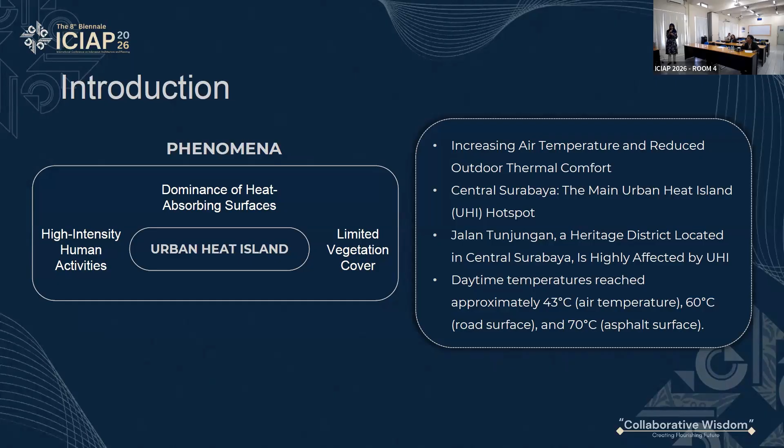For the research gap, previous studies about urban microclimate or urban heat island focus on thermal effects on horizontal surfaces like roads and roofs. Studies on the influence of building facade albedo on outdoor thermal conditions are still limited, and existing research mostly uses simulation microclimate methodology or laboratory experiments with limited field-based evidence.

For research originality, this research investigates the combined influence of building facade albedo and pavement materials on the outdoor thermal environment. The objective is to analyze the effects of facade albedo and pavement materials on outdoor thermal condition, and second, to evaluate how existing material characteristics affect surface temperature and outdoor thermal condition.

This is the methodology. This research uses field observation or field measurement, conducted in October over a 7-day period, but the research focused on 3 clear sky days to minimize weather variability. The location is Jalan Tunjungan heritage area.

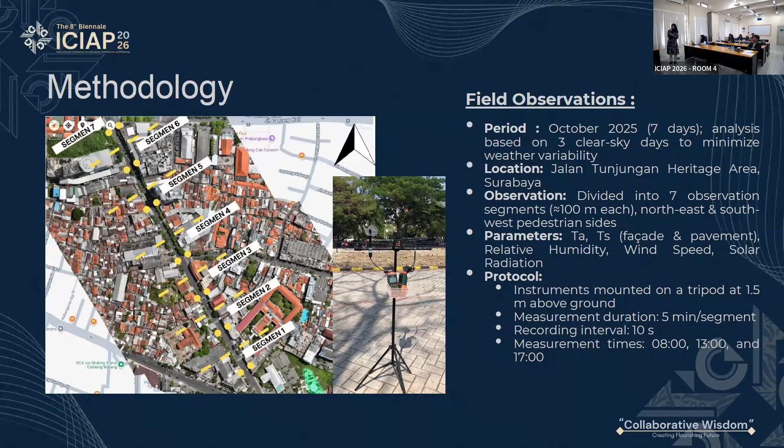This is the result and discussion. This picture shows the physical characteristics across all segments from segment 1 to segment 7. Segment 1 is on the northeast side: pavement combined with coral stone, 2 meters wide. On the southwest side, pavement combined with ceramic, 2 meters wide, and concrete, 2.5 meters wide, with buildings reaching up to 10 meters.

Segment 2, northeast side: pavement combined concrete, 4.5 meters wide, buildings 15 meters, with sparse vegetation. Southwest side: pavement combined ceramic 2 meters and concrete 2.5 meters wide, 5-meter buildings with denser vegetation. Segment 3, northeast side combined with 2 meters coral stone.

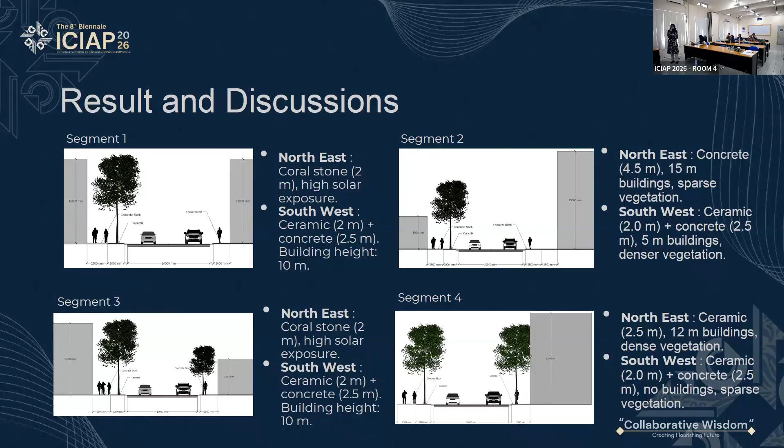And then the segment 5, the northeast side, the pavement combined 2.5 meter and concrete 2 meter with 10 meter building.

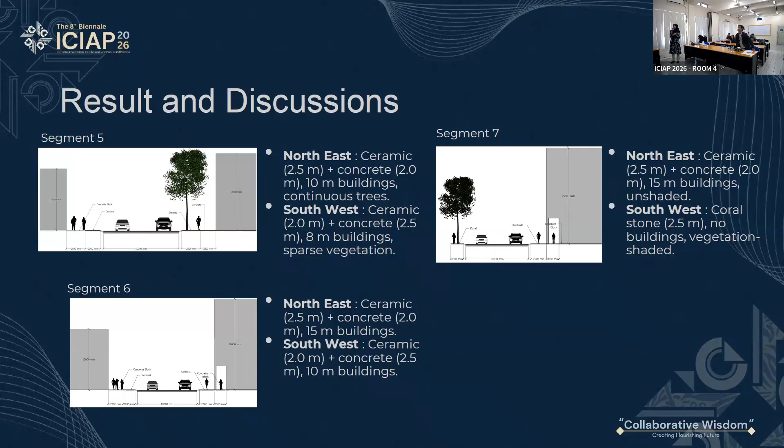So this is segment 6, and segment 6 has similar condition with segment 5 but with no vegetation, and segment 7 has a condition different with segment 6.

This is the optical and physical properties of surface materials in existing condition.

This table shows that material that have brighter color like white color have the highest albedo values, contrast with asphalt with the darkest color which have the lowest albedo values.

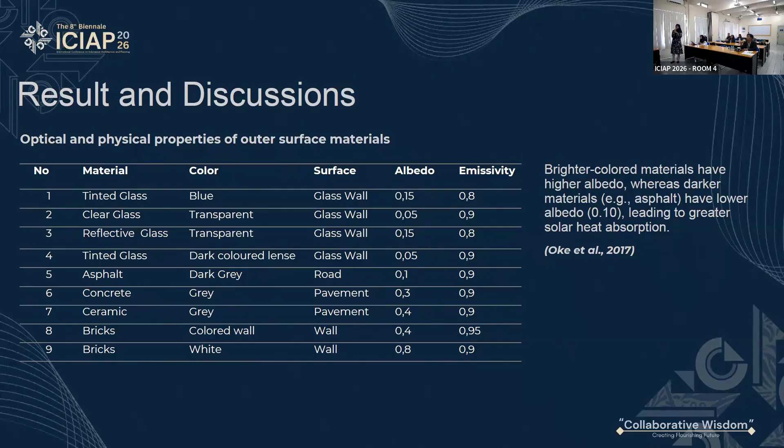This is the result of air temperature. We try to correlate between air temperature and urban morphology. This result shows that between open area ratio

and high albedo materials and height to width and vegetation covered, these four urban morphology have no correlation with air temperature, but the most significant correlation found is in the relationship between height to width ratio.

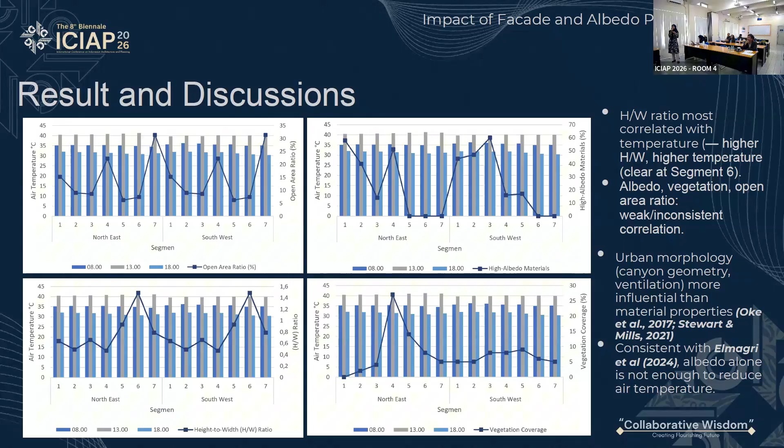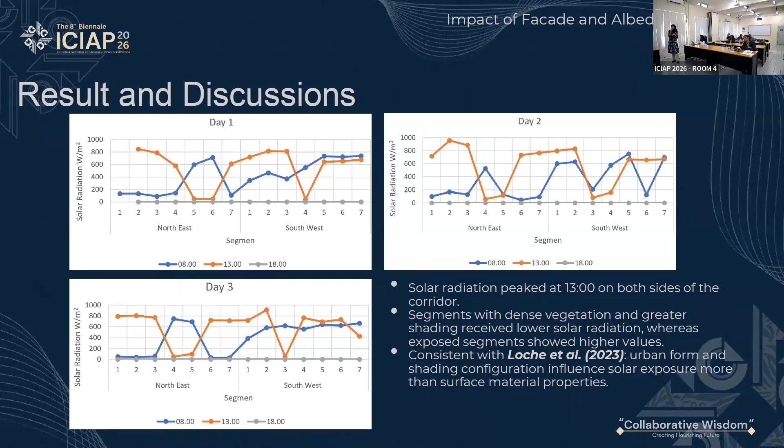This is the solar radiation. This shows the solar radiation is really consistent from day 1 to day 3.

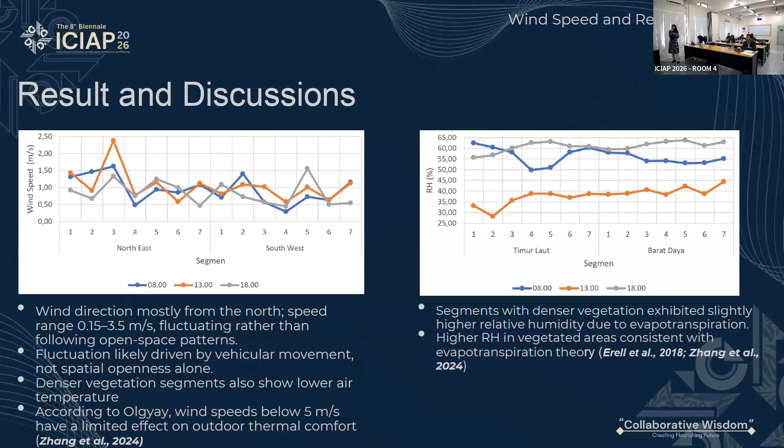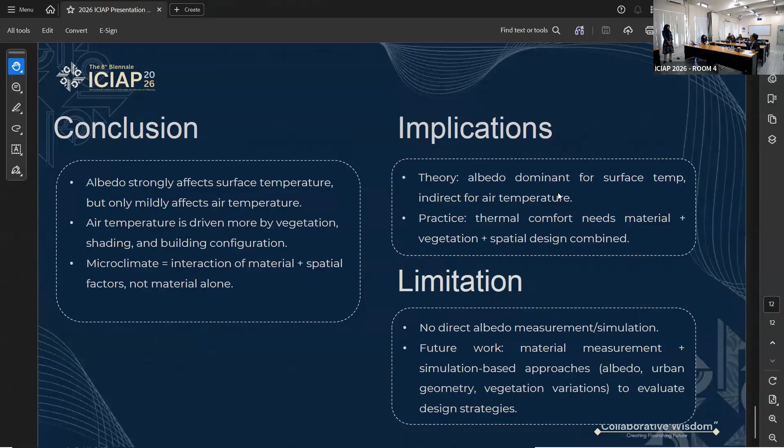Could you introduce yourself, Julia? All right, okay. Hello, Anissa. Okay, this is a bit awkward because we actually work together. But anyways, my name is Audrey, and I'm also from ITS.

So, Anissa, after all of this research, this could be the initial step, right? So what's gonna be the next step? Are you gonna, for example, simulate this using other kind of software, or are you gonna broaden the location objects or the measurement points, or is there anything else?

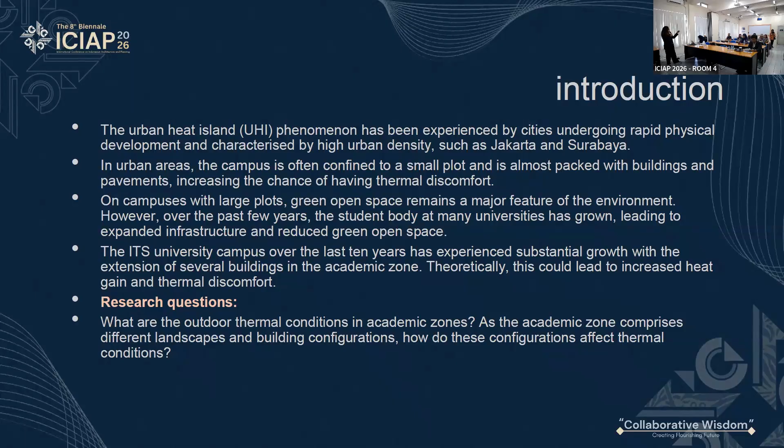And this drives this research question: how are the outdoor thermal conditions after all of these changes in the last 10 years? And most importantly, how does the different landscapes and building configurations, the difference in the ratio, affect the thermal conditions?

Just a bit on to the theoretical framework - I want to talk about how other research has studied the microclimate of university campuses in tropical regions. But our research focused on more than that. We want to see how the ratio between natural features and man-made features affects the formal configurations, and how it impacts air temperature, relative humidity, solar radiation, and lastly, wind speed.

This is the most important part of our research because we're going to rely on this data a lot later on. Our research is again a field measurement, and we try to categorize our campus into 4 big categories.

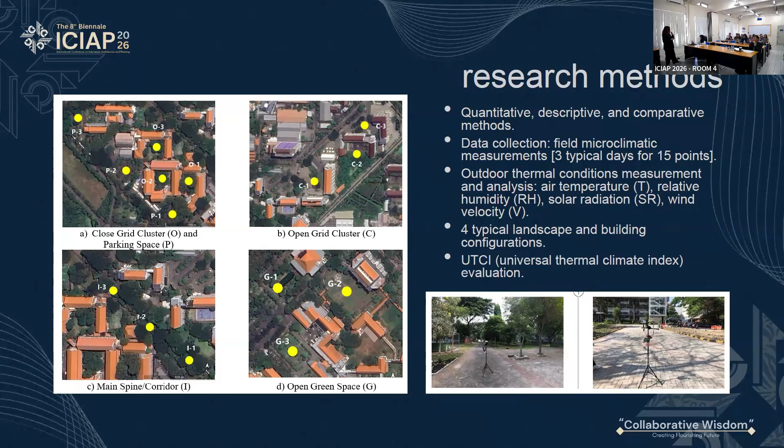Next we also have the main spine or corridor - most likely this is the main road of ITS. They're not enclosed by just buildings, they are covered with dense trees and vegetation. Lastly, we also have the open green space where there are just vegetations around.

Interestingly, after using the sky pictures on top and identifying the ratio between the man-made features and natural features, they appear to be equal - it's 50 by 50 for most of them. But the question is, between all of these 4 categories that I mentioned, do they perform the same, since they have the same ratio? I will talk about that more after this.

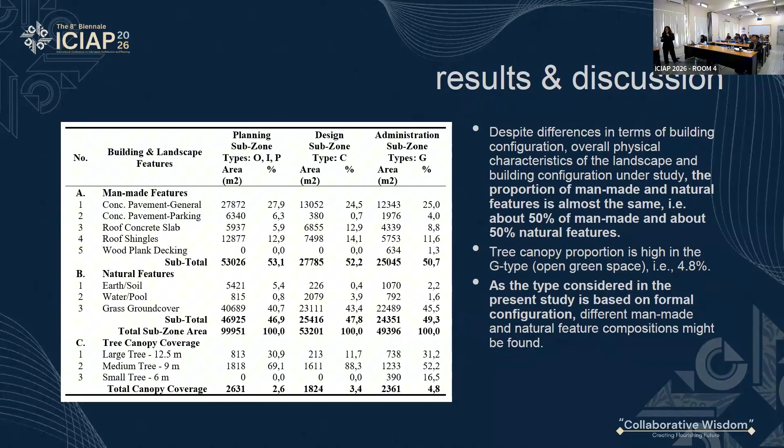Right, so here are our results and discussion. As mentioned before, we have 4 different metrics, so I'll try to dissect into them one by one. The first one, we have air temperature.

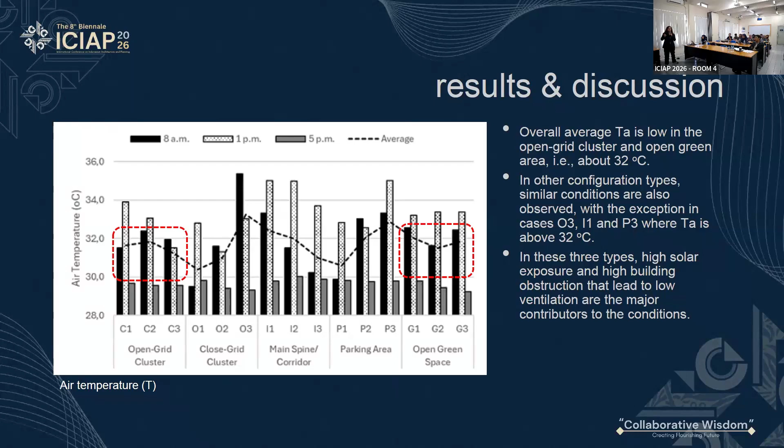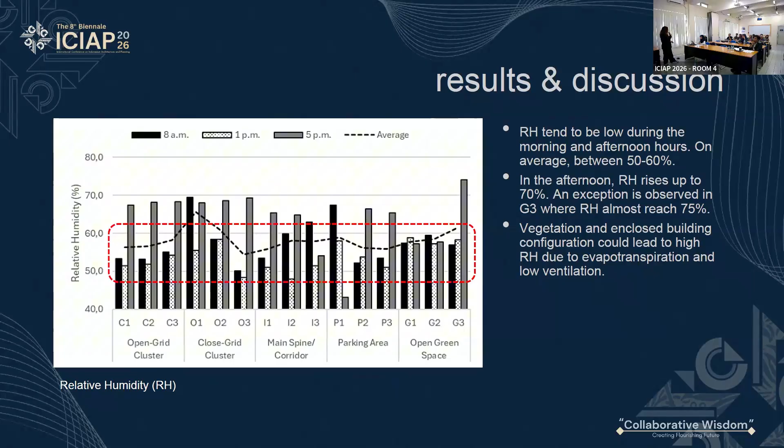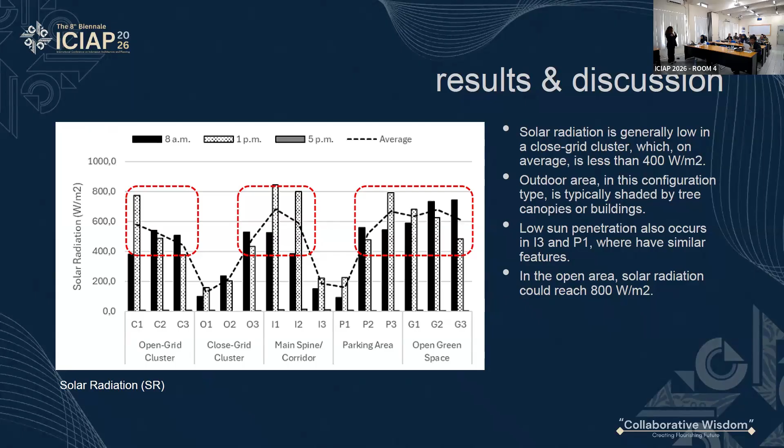But then in the open area, because they don't have any obstructions or shadings, they tend to have really high solar radiation. They reach like 800 watt per square meter.

So now it comes to the last few slides that I have. In general, you can tell that the main spine, which was the main street, tends to have the highest air temperature and also highest solar radiation. This is because of less wind penetration and high solar exposure.

And then when it comes to average relative humidity, it comes to this closed grid cluster. Again, because they are trapped, the buildings are surrounded into a tight square, the heat trapped into the building cannot dissipate, cannot go through the buildings because they're again really tight.

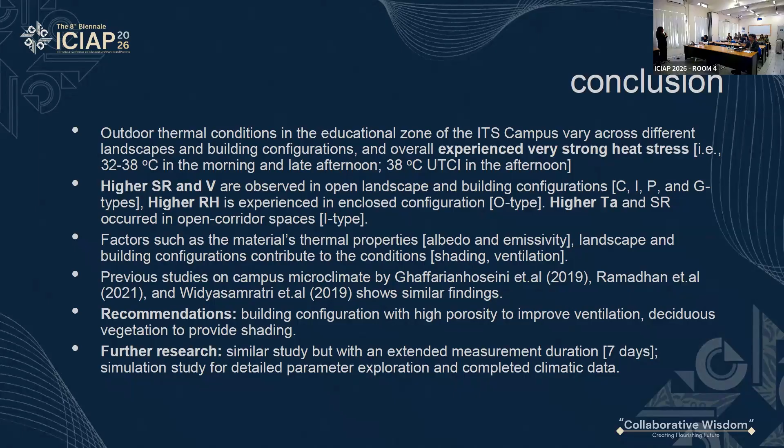Time's up, I guess that was it from us. Here are some recommendations and further research that we can read as well. Thank you so much.

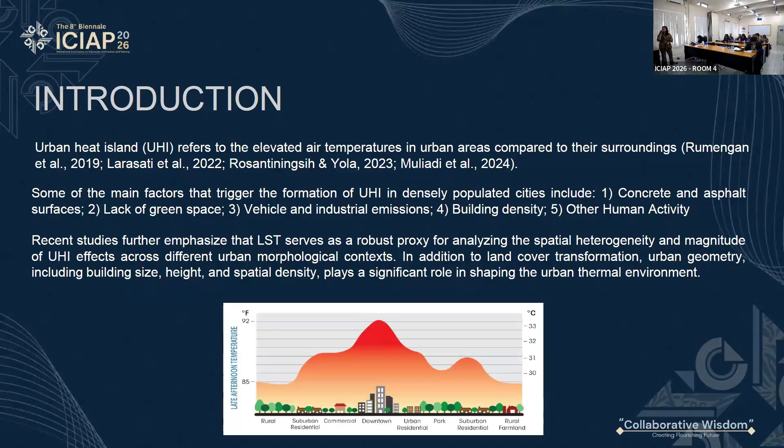As we all know, urban heat island or UHI refers to elevated air temperature in urban areas compared to their surroundings. There are many factors that trigger the formation of UHI, such as concrete and asphalt, lack of green space, vehicle and industry, building density, and other human activity.

Cilegon City, especially, is located in Banten and is developing into the largest steel and petrochemical industrial center in Indonesia. There is Krakatau Steel here, and industrial area covers nearly 30% of its total land area. But there are some places still largely covered by protected forest area, so there is significant variation in building density in this city.

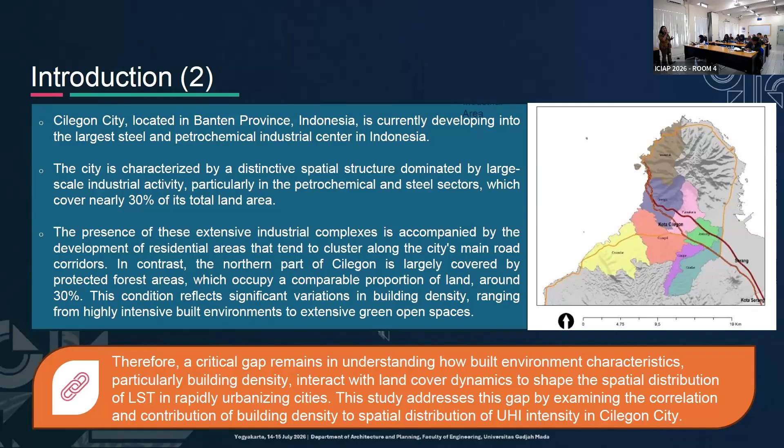Therefore, the critical gap remains in understanding how built environment characteristics, particularly building density, interact with land cover dynamics to shape the spatial distribution of LST, land surface temperature, in rapidly urbanizing cities.

The method we use is correlation analysis by ordinary least squares (OLS) and Moran's, applied to land surface temperature and UHI. The land surface temperature will be categorized into UHI area and non-UHI area, and percentage of building density. Both will be compared in hexagonal cells of 50 hectares, using data from 2010 and 2020.

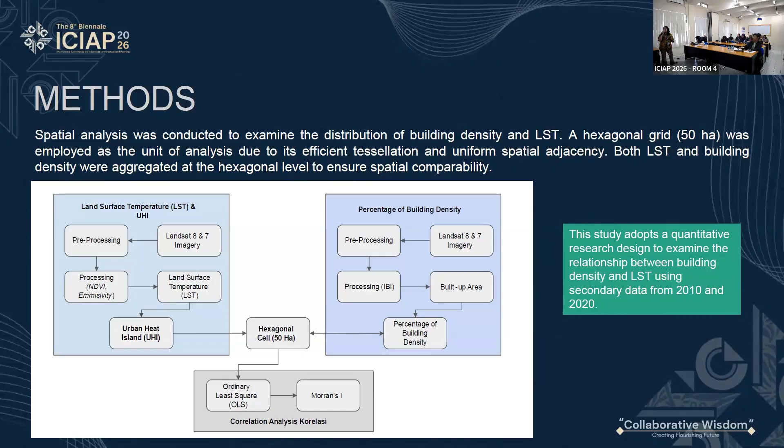And then spatial distribution of LST and UHI. So to differentiate UHI from non-UHI, we use the equation. From the land surface temperature and then UHI, we can see a similar pattern. The red one is UHI and the yellow one is non-UHI.

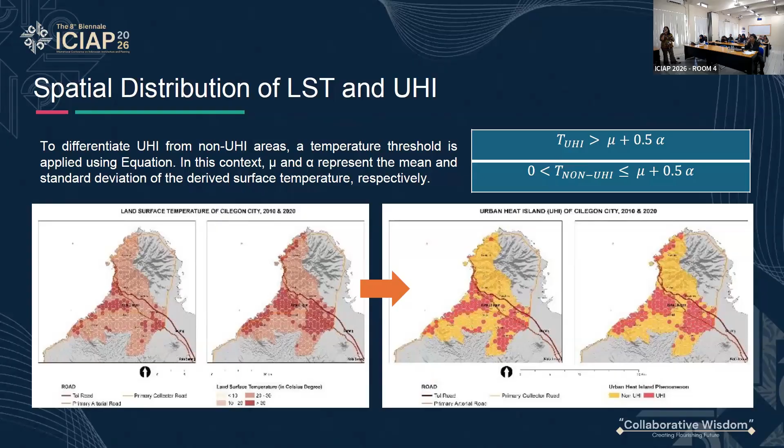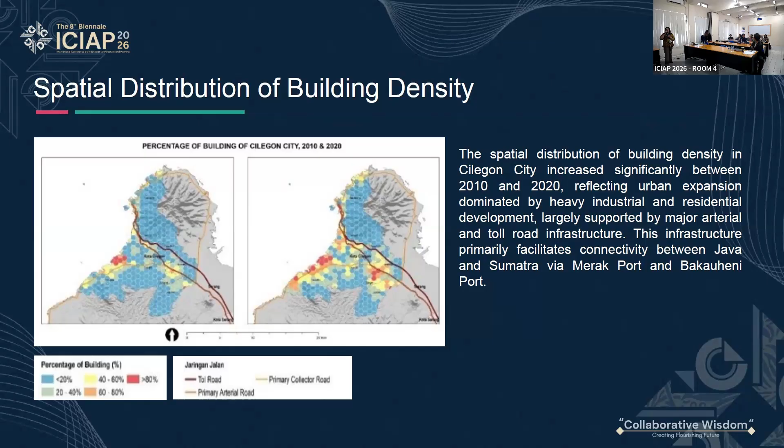For building density, we can see from 2010 to 2020 there is an increase in building density, and this increase is along the main road. There are facilities to facilitate connectivity between Java and Sumatra via Merak and Bakauheni Port, so we can see the increasing building density along the road.

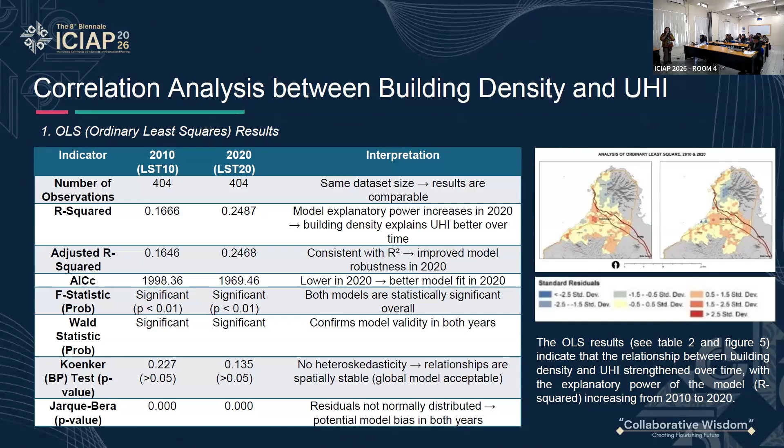After that, we do the correlation analysis between building density and UHI. From the OLS result, we can see that the relationship between building density and UHI strengthens over time, with the explanatory power of R square increasing from 2010 to 2020. We can see R square increasing from 0.16 to 0.24. So we can see the increase, but it's still low, yeah, still low.

For Moran's I result, we can see that the analysis indicates a significant positive spatial autocorrelation in 2010 and 2020, confirming that urban heat patterns are clustered rather than randomly distributed. But we can see that in 2020 there is weaker clustering because the urban expansion is more dispersed.

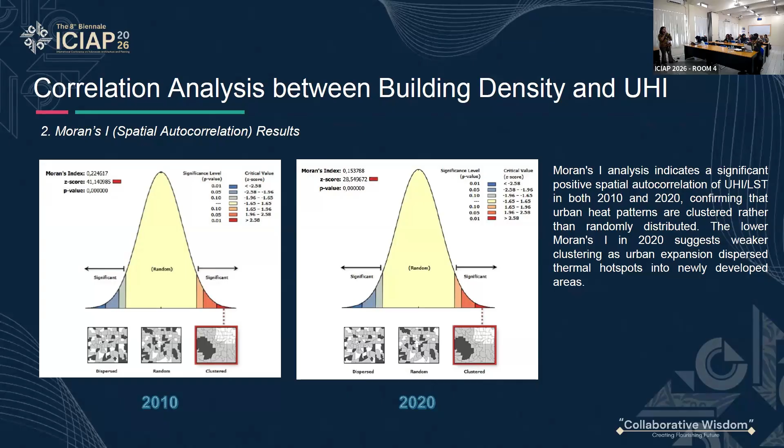So for the discussion, from the OLS and Moran's I, it's confirmed that there's a significant positive relationship between building density and LST, but UHI cannot be explained by building density alone. From the R square we can see the number is still low, meaning there are other factors that contribute to UHI.

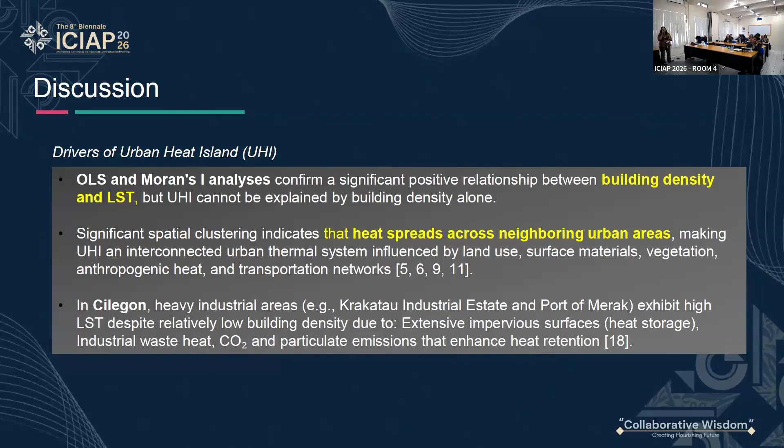In Cilegon, we can see that there are places that exhibit high LST despite relatively low building density, due to industrial waste heat and carbon dioxide emission from industry.

And then what can we do as a planner, what is the mitigation? First, we can increase non-built land, and then strengthen the green space provision or Koefisien Dasar Hijau (KDH) to be stricter in the industrial area.

This one is interesting: creating connected green corridors rather than isolated green spaces, so the corridor gives more cooling. And then integrate UHI mitigation into the RTRW spatial planning through green infrastructure, high albedo and permeable material, waste heat management, emission control, and industrial buffer zones.

So the conclusion: this study demonstrates that there is a significant positive relationship between building density and LST in Cilegon City, and there is a strengthening of this relationship from 2010 to 2020, indicating that urban densification increasingly contributes to the UHI effect.

However, the Moran's I analysis confirmed that this relationship is not spatially uniform—the UHI pattern exhibits significant clustering influenced by local conditions. In particular, industrial land use plays a critical role where high surface temperature occurs even in areas with low population and low building density. This highlights that many factors contribute to UHI in Kota Cilegon.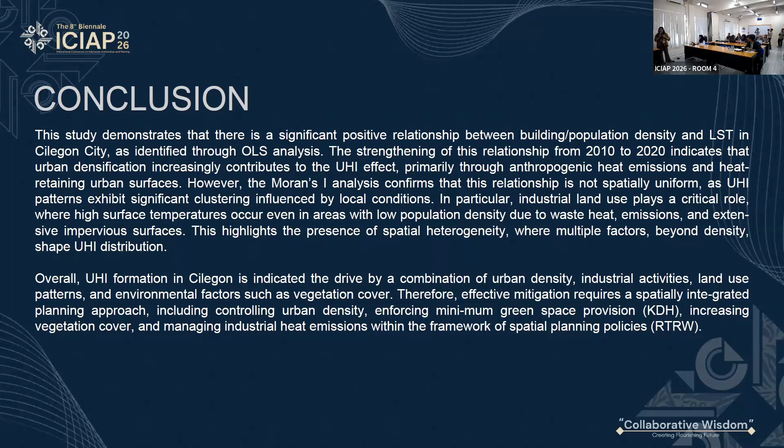Therefore, to do mitigation, it requires a spatial integrated planning approach, including controlling urban density, enforcing minimum green space provision, increasing vegetation cover, and managing industrial heat emission within the framework of spatial planning policies such as RTRW or even RDTR. Okay, that's all. Thank you for your attention.

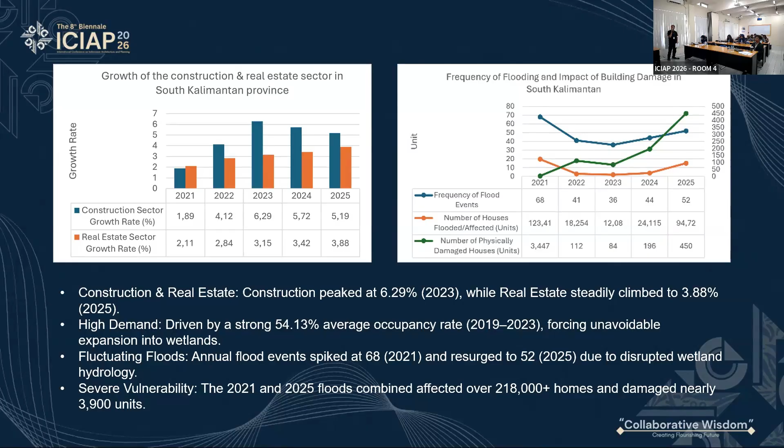However, driven by growth of real estate, buildings, houses etc., from about 54%, this is getting bigger each year, causing wetland coverage by buildings, and technically increasing flooding and building damage impact in South Kalimantan.

From my previous studies, along with my lecturers Muchammad and Huzairin, we highlighted the construction of traditional houses and identified the conceptual framework of the Suku Banjar community. The previous studies also only covered one object, with no building criteria, so this research identifies the correlation between resilience and building in the community.

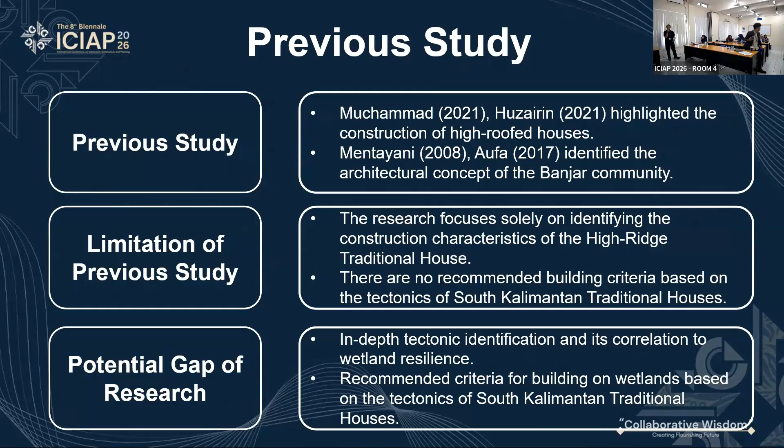So the output and goal of this research is to observe the tectonic characteristics and capability of wooden construction, and provide recommendations for vernacular building.

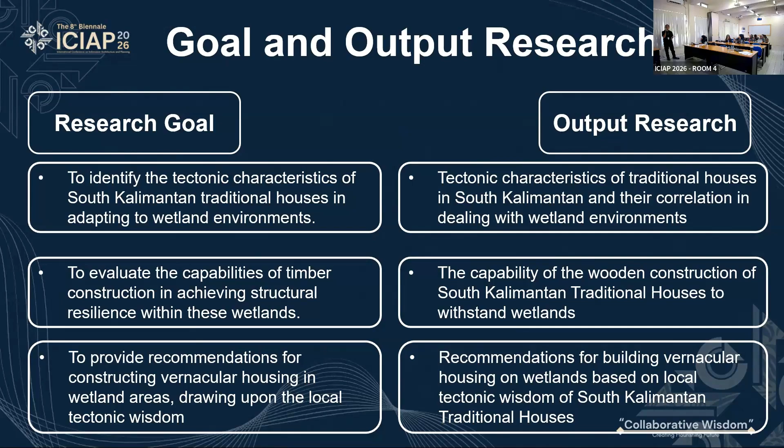The conceptual research framework - the output of this research is building knowledge in vernacular construction for wetland resilient buildings and flood mitigation in South Kalimantan.

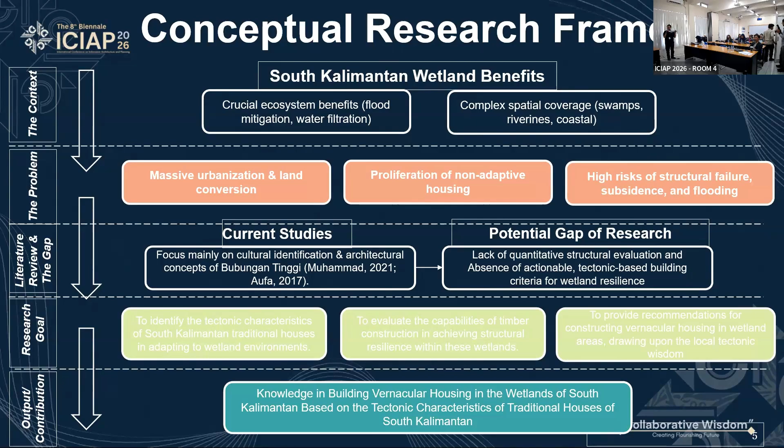For the objects, from 12 typologies, we use only 2: Bubungan Tinggi and Gajah Baliku. The methodology has 3 steps that I've conducted: Goal 1 using qualitative method, Goal 2 using quantitative method, and Goal 3 using mixed-methods synthesis.

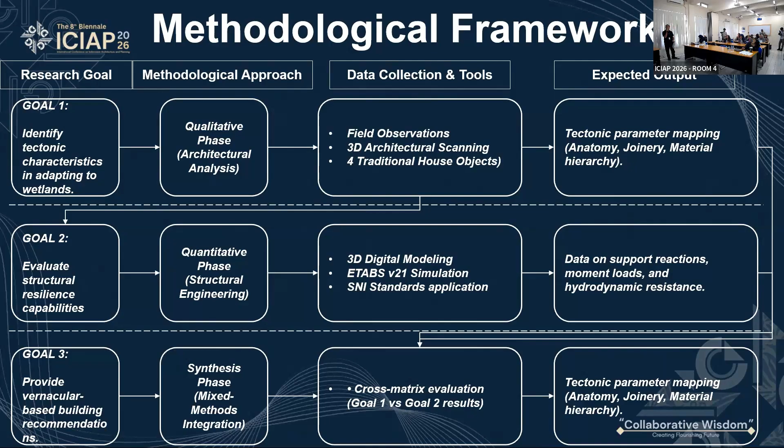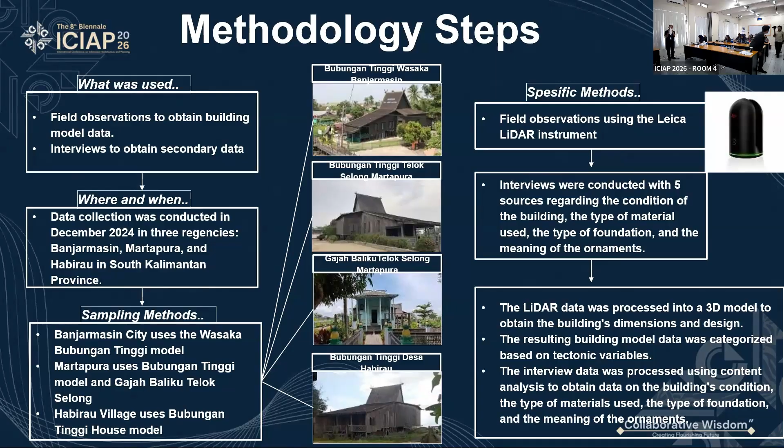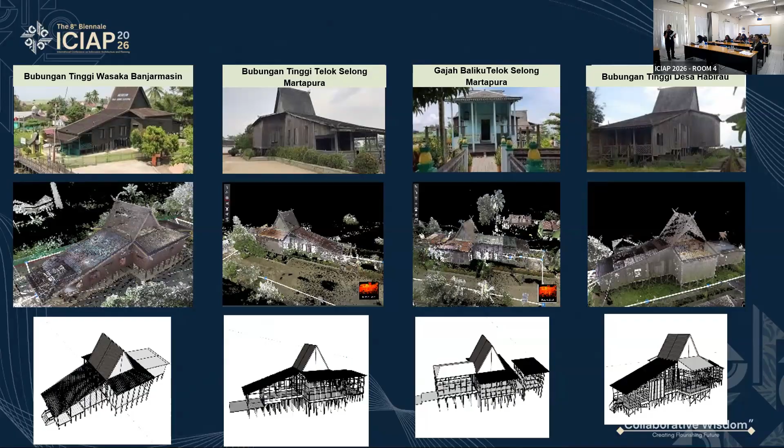The methodology: the first step uses qualitative methods with tools called Leica LiDAR, using 3D object scanning across 4 objects. After using Leica, we use 3D tool software, and from this software we analyze the previous synthesis tectonic variables.

And so for the research findings. Why can South Kalimantan traditional houses withstand wetland conditions and provide flood mitigation?

First, we should cite the site orientation, which is towards the river, and the building coverage ratio, or KDB, which is under 30%.

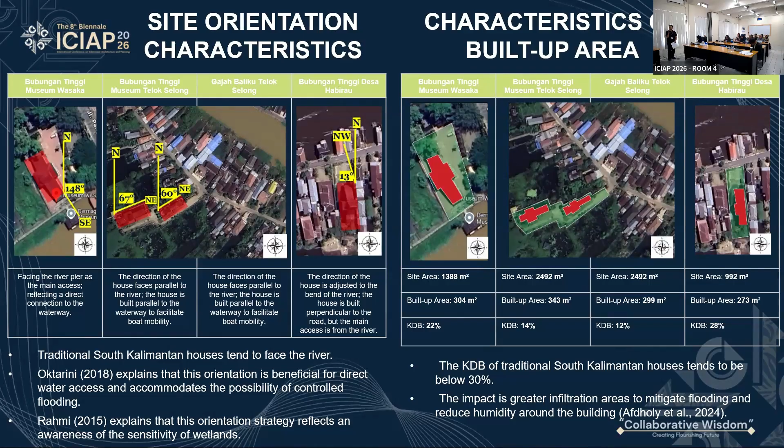As for the building mass, it tends to be slender and symmetrical, and the characteristics tend to follow more hierarchy.

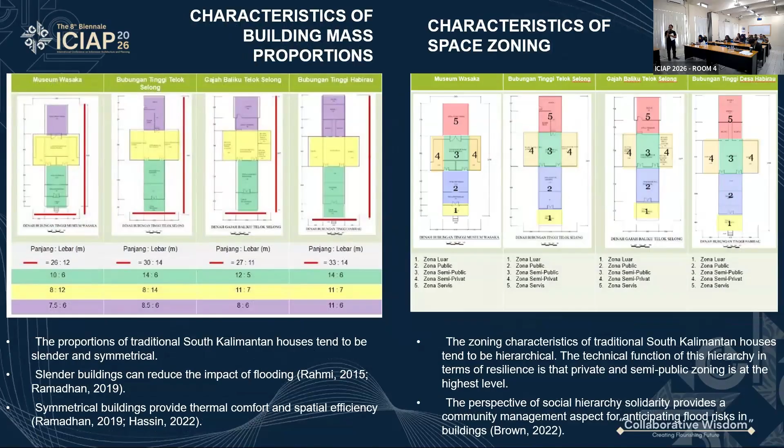For the building space, it tends to be symmetrical with ample circulation, and the internal space tends to be quite interconnected. This connectivity helps address challenges from humidity, thermal comfort, and improves disaster evacuation.

As for the window-to-wall ratio, the proportion tends to be much higher, around 45 and 40%, which helps mitigate thermal comfort and humidity issues, and also aids disaster evacuation.

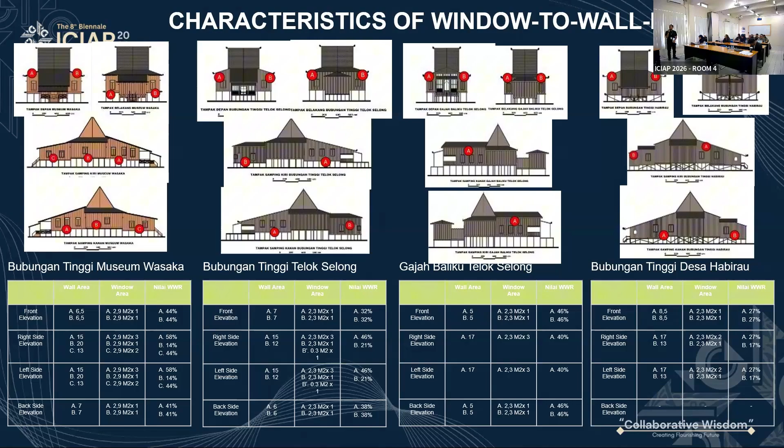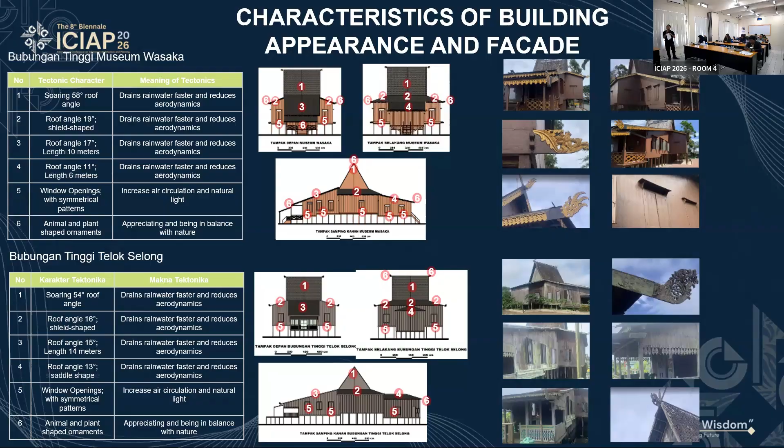As for the facade, the roof has about a 40 degree angle, which tends to mitigate high rain frequency. This is also seen in the same object.

From this building classification, we can see it is a stilt building, and the roof itself is at 40 degrees.

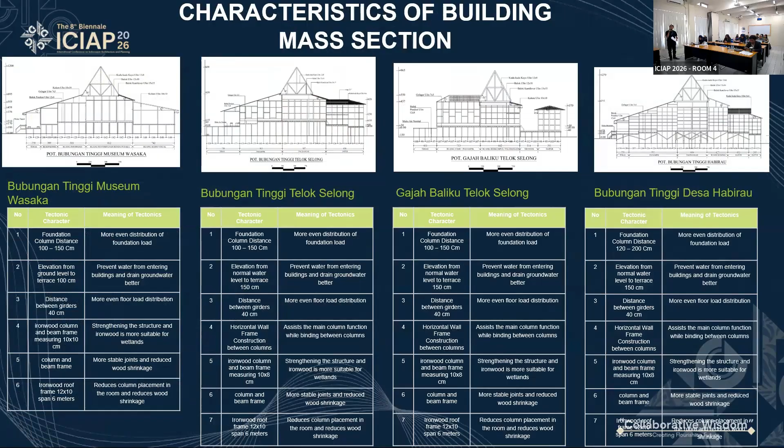From the architectural plan, it is also the same, with the building roof needing to be at 40 degree angles.

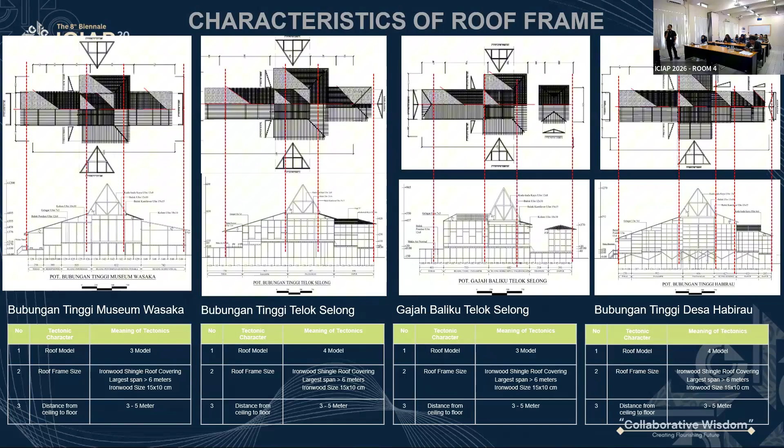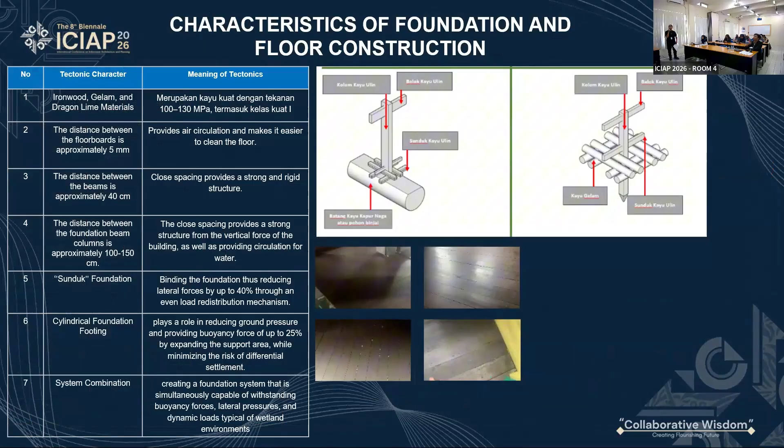This is what's called the uniqueness of South Kalimantan traditional houses. It has what's called a Kacapuri foundation, which can withstand about 100 years of wetland conditions and flood mitigation.

From the columns, there are pasak, mortise and tenon joints, lap joints, and takik joints. After using takik joints and mortise and tenon joints, simulations using these joint types show they can increase the effectiveness of the framing.

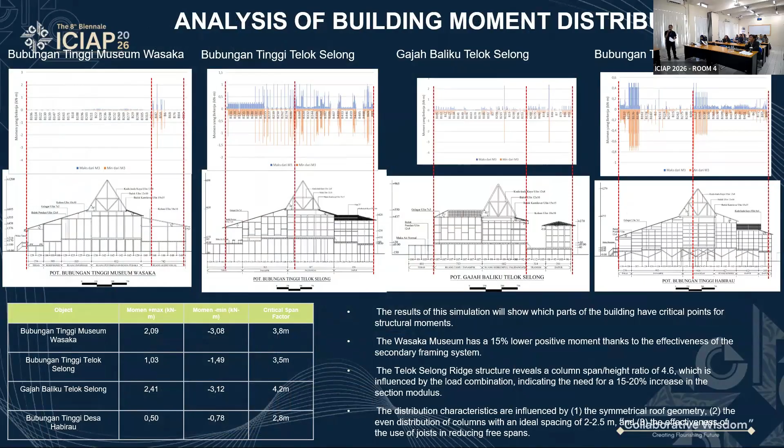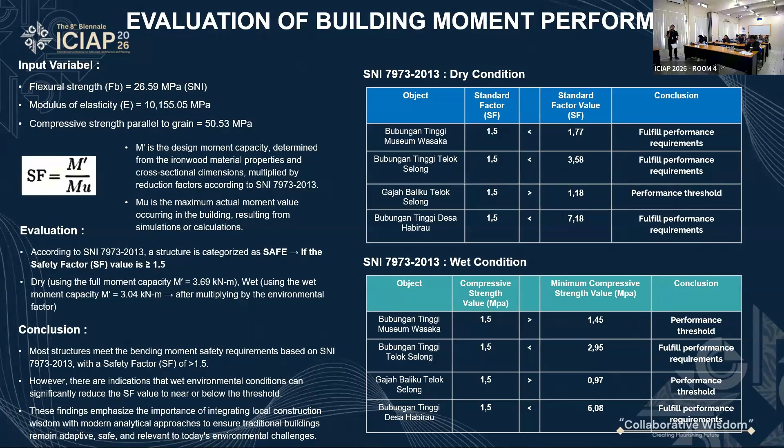This is simulated between using wet condition and dry condition scenarios.

From the support analysis, using rotation joints has actually increased the load distribution, and can increase capacity at certain points while lowering load at others.

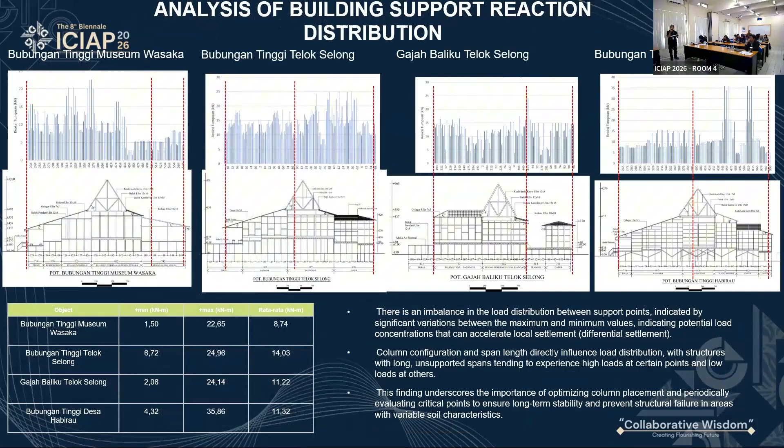From the support building reaction using construction materials, the building has fulfilled its performance requirements based on the Indonesian National Standard and American standard for wood construction.

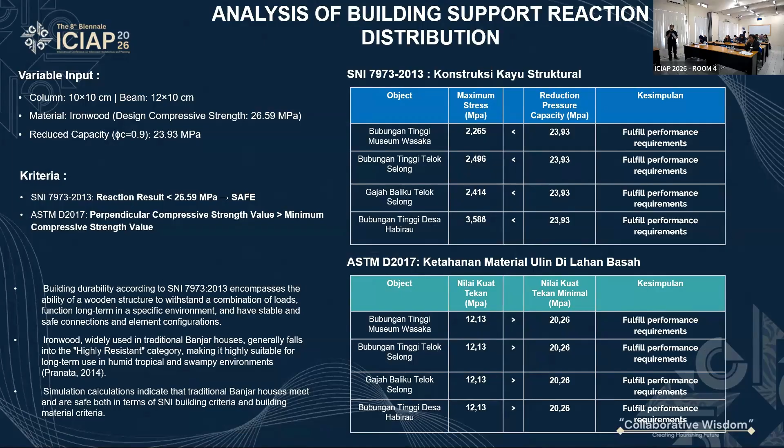This is for hydrodynamic analysis, because we intend to withstand disaster flood mitigation. Using simulation, the building itself has withstood the hydrodynamic pressure, and it is actually safe, not destructive.

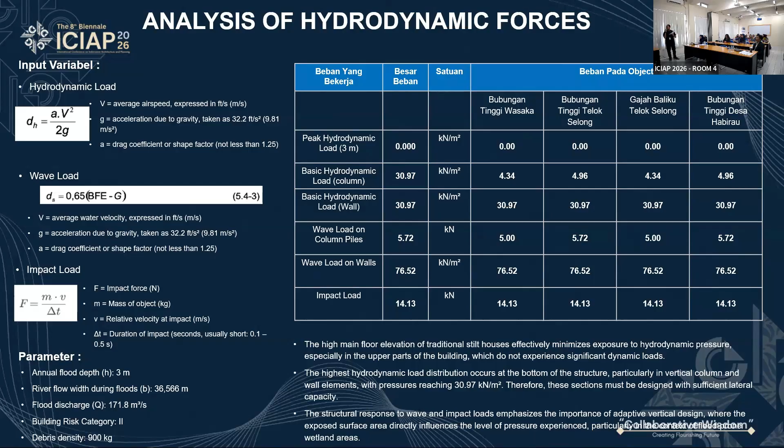As for why the building can withstand flood mitigation, it's because the building uses ironwood construction.

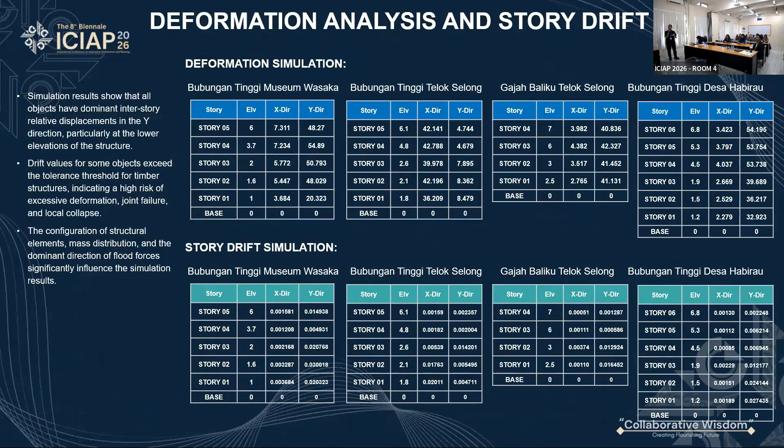This is the conclusion: the building itself can be much stronger, and we can learn from local technologies, that past technologies can teach us how a building can withstand disaster conditions.

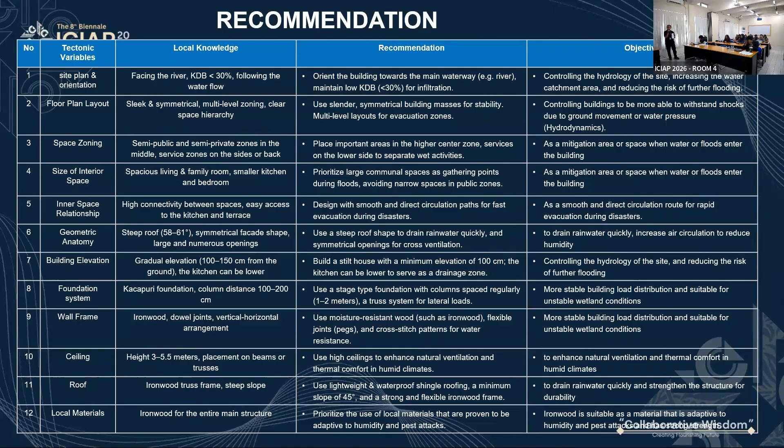This is the main conclusion. The problem of building houses in wetlands, with unstable conditions, can be solved through tectonic application. The key findings show that tectonic aspects of tradition contribute to durability and sustainability. This tectonic basis can be used as a consideration in construction, and this research into tectonics can be one way to develop building methods on wetlands to maintain the sustainability of the environment and the building.

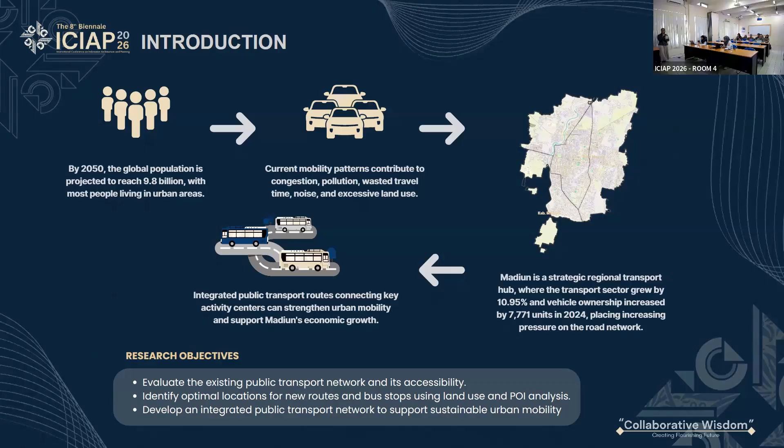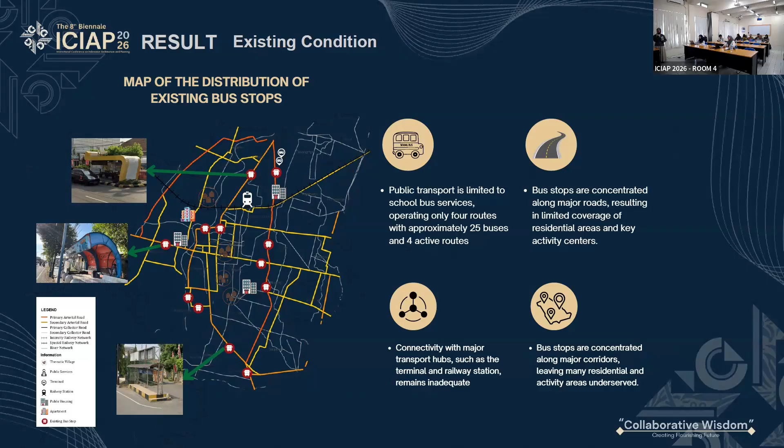This is the result for the existing condition map of Madiun City. Public transport in Madiun City is limited to school buses. The transportation in Madiun just concentrates on the major or main route, and the connectivity with the terminal and the railway station is uncovered.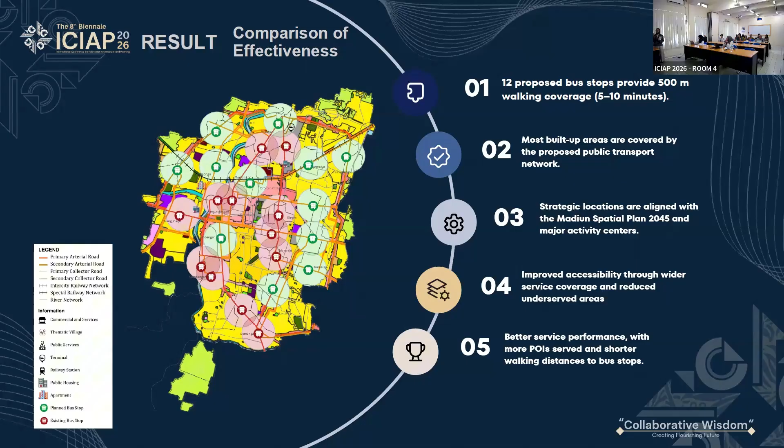Next, this is a result for transportation routes, the existing and the proposed route. This result shows four new transportation routes connecting the railway station, the commercial area, the education area, and others.

This result can show the transportation demand projection. Finally, in 2045 there are new buses, along 92 buses. This is a discussion from this paper.

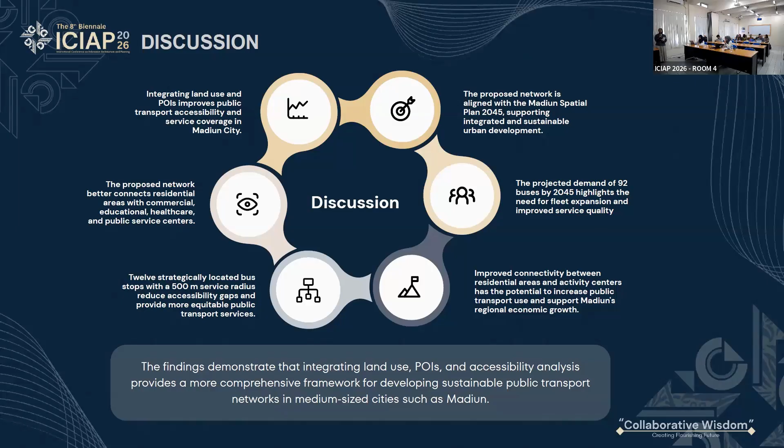There is integrated land use and point of interest to improve the public transport, and the proposed network is aligned with the Madiun spatial plan to 2045. The proposed network can provide better connectivity like residential area and then commercial, education and others, and the projection demand maybe 92 buses in 2045, the need of fleet expansion.

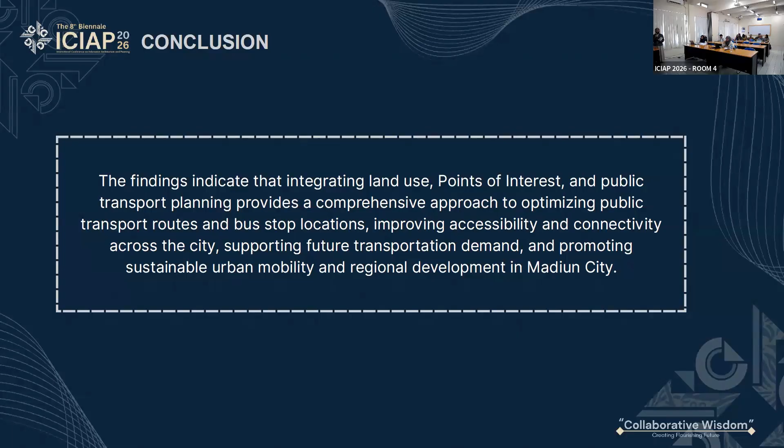And this is the conclusion. The findings indicate that the integrated land use, point of interest, and public transport provide a comprehensive approach to develop urban mobility in Madiun City.

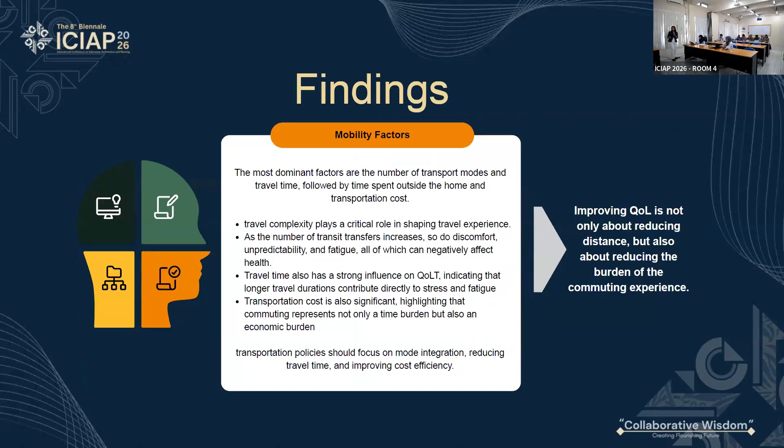The contribution of the study is three contributions. The first is academic, to develop an objective and data-driven approach, and the methodological is to combine correlation and many other statistical analyses. The policy contribution is to provide evidence for spatially targeted transport and urban policy. The recommendation is to improve mode integration and reliability, reduce travel time and commuting costs, and use quality of life based spatial policies.

To conclude this study, mobility is not only a transportation issue but also a health issue and a quality of life issue for urban areas. Thank you. That's all about our presentation. I give it back to Bu Isti.

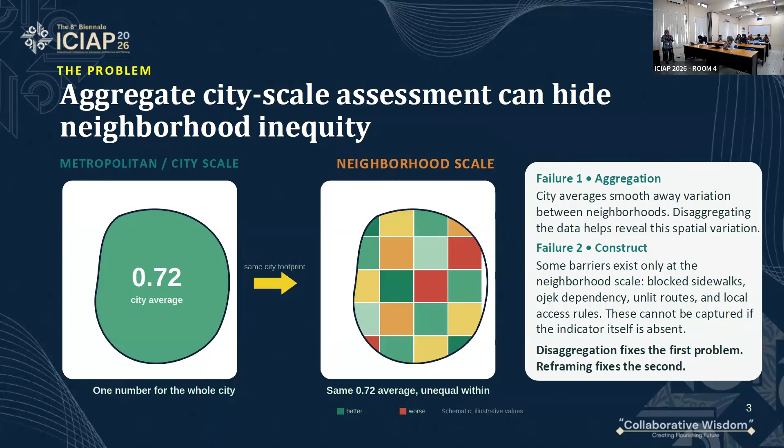Second, about construct: some barriers exist only at the neighborhood scale, like blocked sidewalks, ojek dependency, unlit routes where streets are too dark at night, and local access rules. This cannot be captured if the indicator itself is absent. So disaggregation fixes the first problem, but reframing fixes the second problem.

There is evidence from Indonesia and other global South studies showing neighborhood scale mobility gaps—first/last mile gaps, travel cost burden, safety and comfort, and informal modes and local rules. These conditions rarely appear as indicator variables in city scale sustainable transport indicators.

And then, data intensive frameworks have been developed but require adaptation to the Indonesian urban context. So this study responds to that gap through an equity responsive sustainable mobility framework.

In ERSM, we position the Kelurahan in Indonesia as the diagnosis operational scale—from aggregate performance down to distributive neighborhood diagnosis, and then from the diagnosis to differentiated policy response.

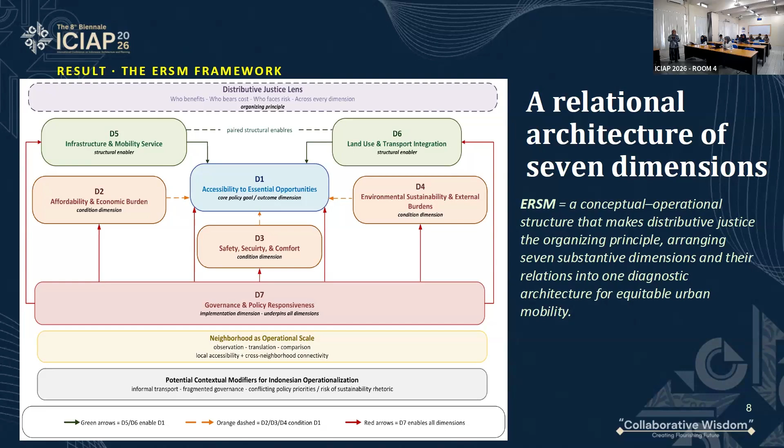A second result is about mapping national policy against the 7 dimensions. I reviewed about 43 national policy documents, including Indonesian laws, government regulations, and ministerial regulations. The score shown in this presentation measures normative instrumental density. I'm not measuring the policy performance. In other words, it shows how strongly each ERSM dimension appears in policy text and instruments, not whether implementation has succeeded in practice.

So the key finding is that national policy support exists, but its translation into neighborhood scale distributive diagnosis is still weak.

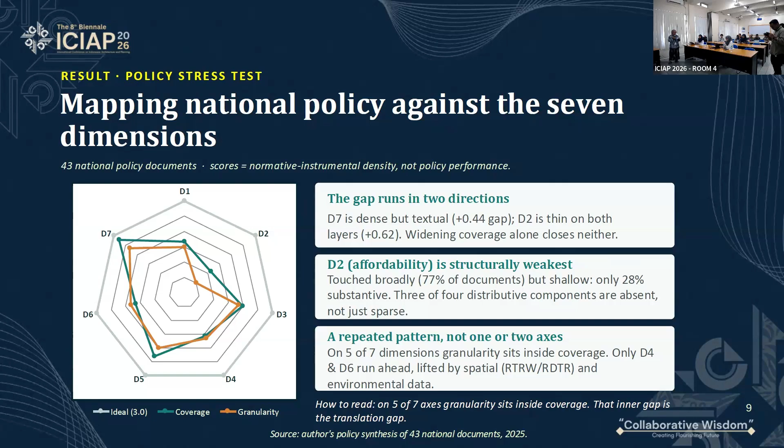My research contribution, conceptually and theoretically, is integrating distributive justice and relational dimension logic into the Indonesian kelurahan context as part of the diagnostic architecture. The methodology and operational pathway design is ongoing, and for planning practice, it offers a diagnostic planning tool that translates mobility and equity into spatial intervention.

There are several key findings: this translation gap is systemic; affordability is structurally weak across the policy landscape; and ERSM repositions the neighborhood as the diagnostic operational scale integrating equity and sustainability.

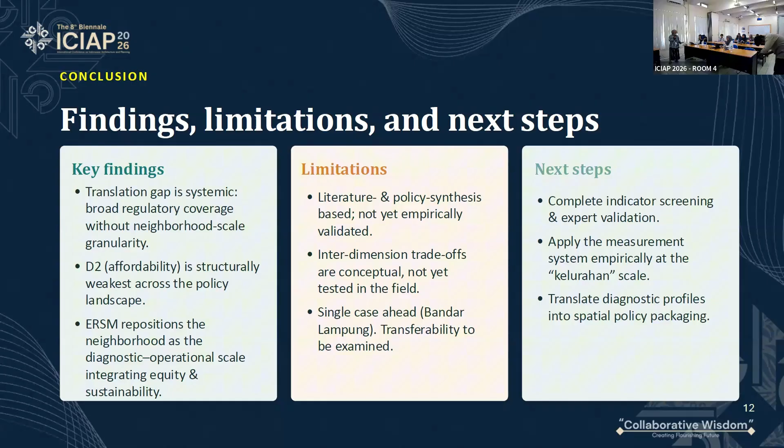And this is my limitation. Okay, maybe that's all for my presentation. Thank you.